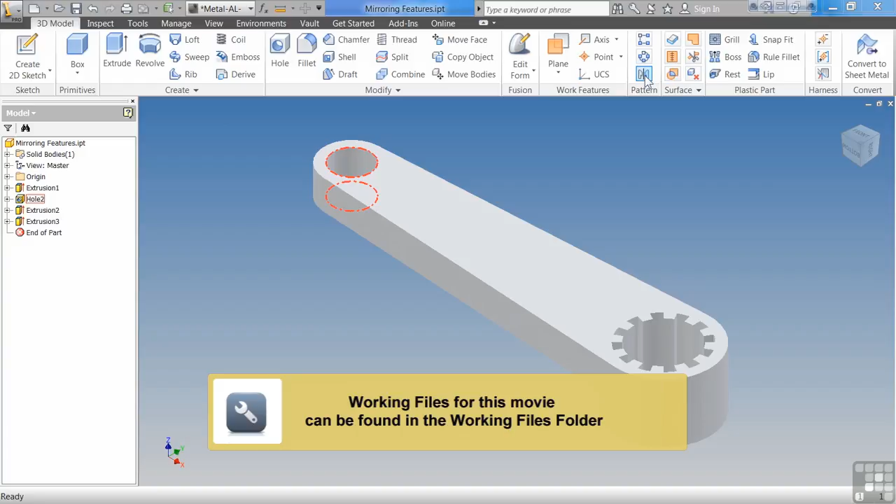In this exercise, we're going to be discussing mirroring features, which is part of the patterning group, up here underneath the rectangular and circular patterns. We select mirror feature. As I said before, I think Picasso is credited with saying good artists borrow and great artists steal, and it's not necessarily from somebody else.

We're going to steal stuff from ourselves. If you take a long time creating a very complex feature, you don't want to have to repeat that 3 or 4 or 5, 6, 7 times. You want to be able to reuse that data quickly and easily. And to show you how easy it is to mirror, you can look at how few options there are.

Basically, you have 2 selections. The stuff over at the left - do you want to mirror just a feature or the entire solid? If you're in the mirroring feature, you're probably going to be mirroring a feature, so you don't really need the solid one. Same with the solid down here - this is more if you had a solid you brought in from something else. So really the only 2 selections are: what do we want to mirror?

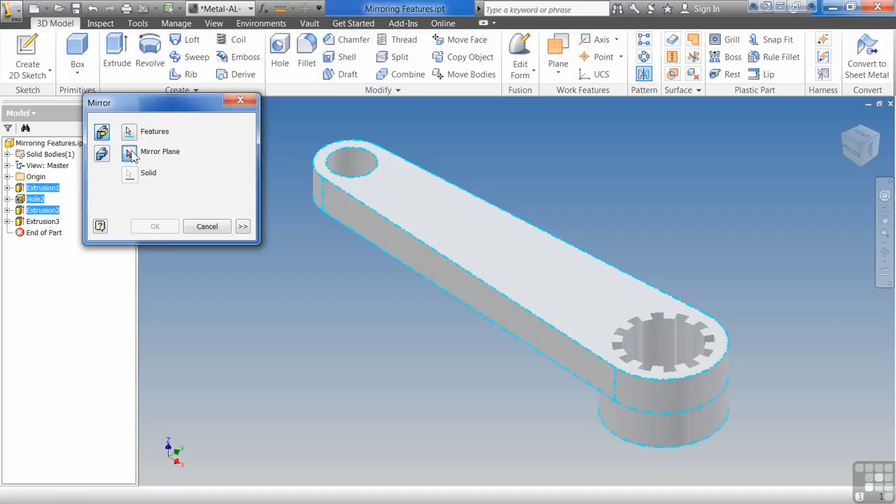I'm going to select the red arrow there, and then this hole, this lever, and this round here. And then the next option is, where do we want to mirror it? You have to have a mirror plane, and I'm just going to select the bottom face there, and that will work for that plane. Hit OK.

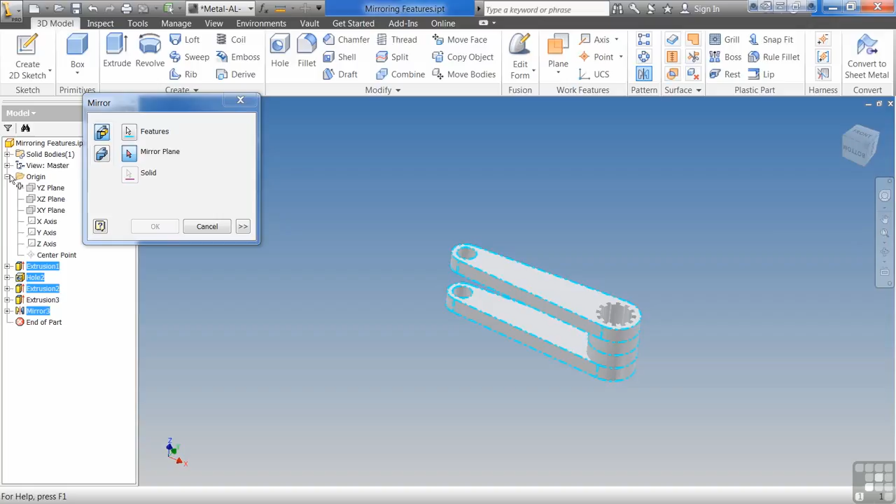Look at it, I'm going to say mirror, and I mirror this object. This time I need a mirror plane going through the middle here. If I didn't have an origin plane going through there, which I do - if say the origin plane was through the middle of the part, I could come up and draw an axis through this round and then put a plane on it and make it normal to the origin plane. In this case, I actually have an origin plane, so I can just select that and say OK.

And I have my part. Now you'll notice that the center went away - the center hole. The reason is because I didn't mirror it. I didn't need to mirror it because I wasn't going to create 4 holes. I only want 1 hole.

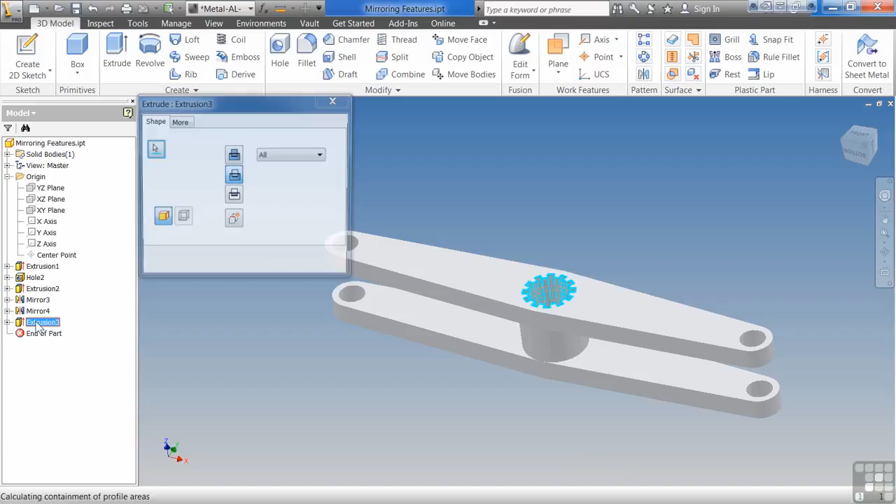So what I need to do is grab it and drag it to the bottom of my part. Because this is an extrusion, if you look at it, it's through all - I have to do is move it down below the mirror and it'll go all the way through the part.

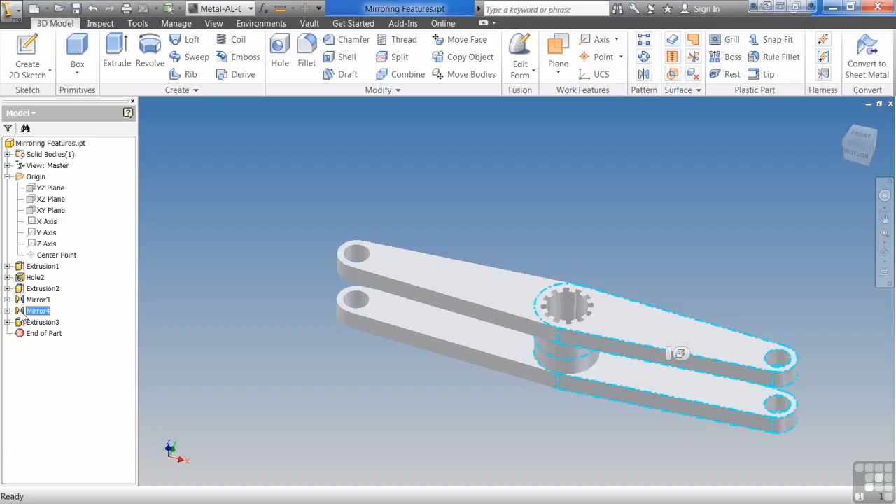It's pretty simple. Now, if I want to come in here and add something else to this part, say I want to add it to both sides, so I want to add it to the mirror, the easiest way to do it is to click on the mirror. Say I want to add it before I do the half mirror - right click, and say move end of part marker, and that moves it up. I'll move it all the way up here, so my mirror goes away.

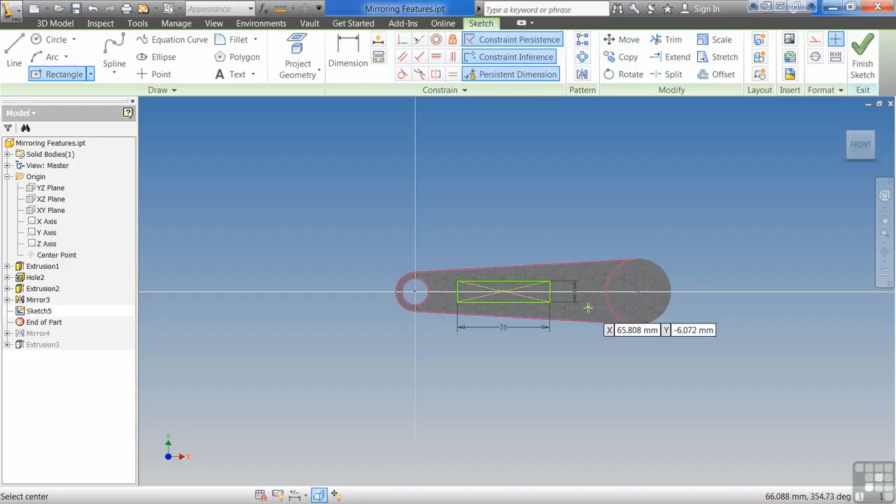Select my face, hit F7, and I'll do a center point rectangle. 35 by - let's do 8. Hit enter. And then I can dimension it where I want it to be.

40. Finish. Say extrude this to next. Okay, looks something like that.

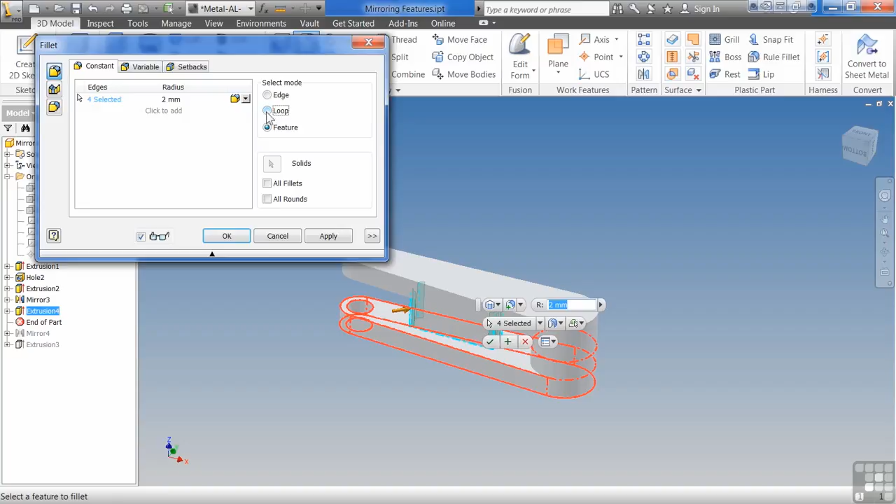Say fillet, grab the feature there, then grab the loop around the bottom of the feature. Grab the loop around the top of the feature here. Get my little toolbar there out of my way. Make sure I got everything I want. Hit OK, and just drag the end part back down.

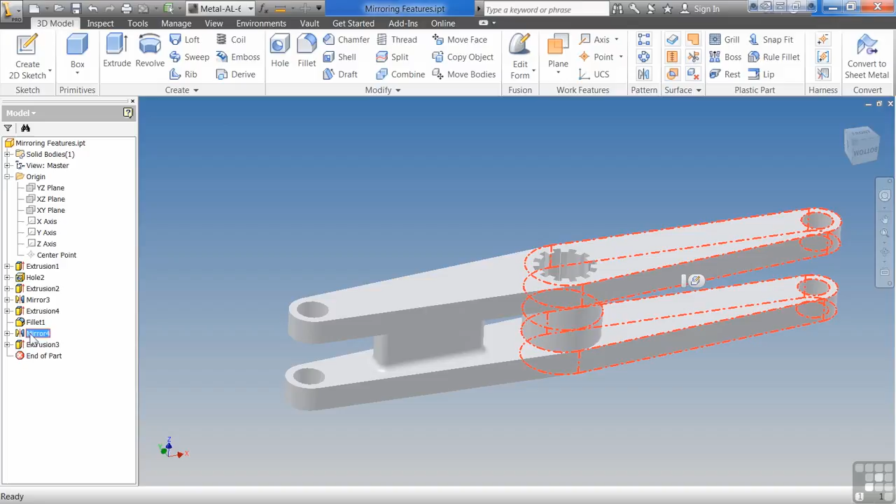Notice it didn't automatically add that information in there. It's not going to go through and assume anything on you there because you may not want that to go to the other side. In case you do, all you have to do is come up and say select feature, and I can even select them over here in the browser, hit OK, and now I get that on both sides of the part. Now realistically that would be impossible to mold or machine just like that, but we'll pretend this is a weldment for a moment.

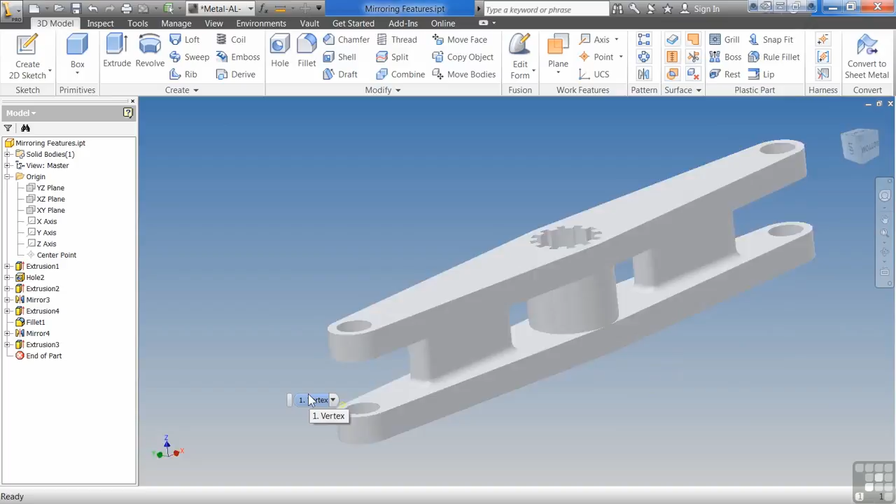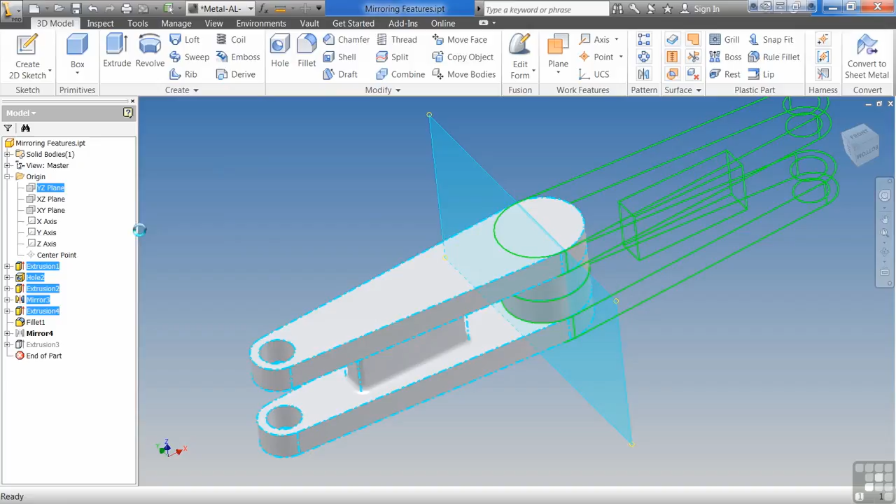So you can see how easy it is to use the mirror command. If I wanted to go back and remove something, I could just go back and deselect it. Right click and say edit feature. Select on the feature command, hold down control, and I can decide what I wanted to remove. If I wanted to remove the fillet out of the mirror there, you see one side's filleted, one side's not.

It's really easy to use. It's not a real complex feature. Play with this, see what you can do, and think creatively.

With the 2013 version, you can actually just mirror the feature without the base feature that created it. In the past, you actually had to mirror the extrusion and the fillet. Now you can just mirror the fillet as long as it makes an effective fillet on the other side. That's one of the new features in 2013.

Play with it, see what you can do, and think about creatively how you can use this in your designs. What can you make that's symmetrical that you only have to draw one time and you can mirror it from one side to the other? It's a very powerful tool and it's very easy to use.